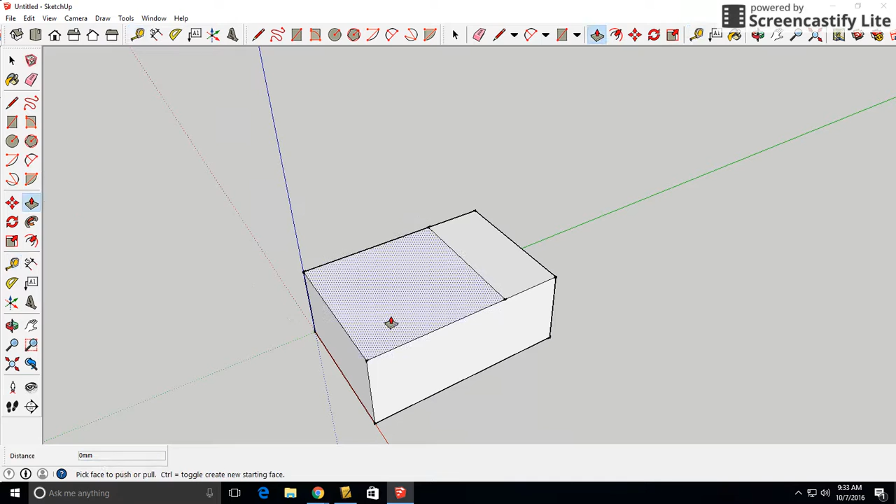If I come back to my image, just to verify, the overall height is 40. So that helps identify we're going to bring this surface down a distance of 20 millimeters, and we're going to remove that section. That's going to get us started for the lower half.

Now on the back section here, there is a cutout, and we need to do that one before we can extrude through the front face. Looking at this back piece of detail, we see that it is 40 millimeters wide, and it extends through the entire back part of that drawing.

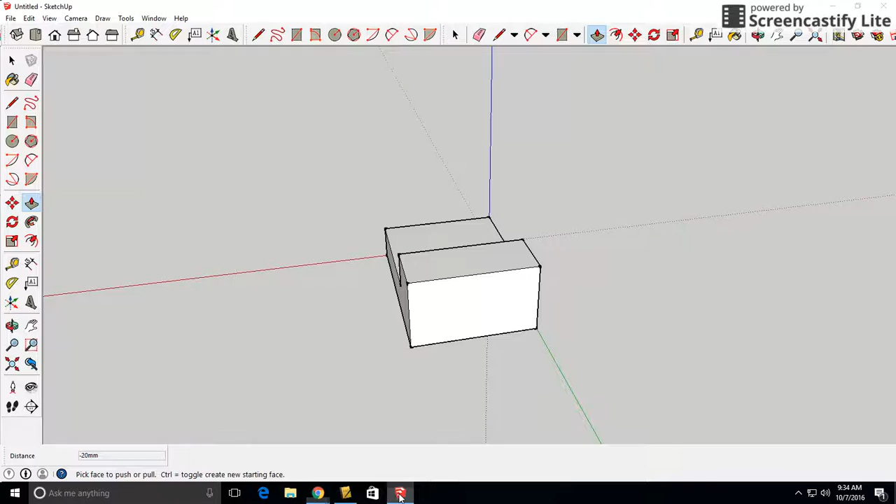Now, there is no center point identified, but in this drawing, these features are on center, so the center point of this would be at the 20 millimeter mark, the middle right there. So the first thing I need to do is identify the center of the back part of this feature. We know the overall width of that is 70, so half of 70 would be 35.

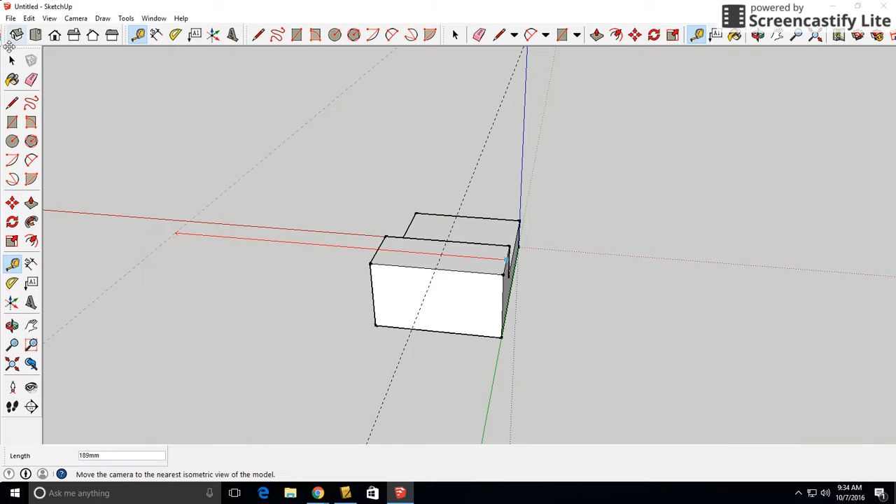So I'm using the tape measure tool to give us a reference mark 35 millimeters in from one edge. If I measure to verify, it's also 35 from the other point, so that way we know we're halfway. Now I'm going to use the pencil tool, and we're going to sketch out this feature.

Now we know that that feature is at a depth of 10, and we see that dimension here. It is 10 millimeters deep, 40 millimeters wide, and it spans the entire depth of the project.

So I can come back here. Now, if the overall width is 40, that means half of it is going to be 20. So I'm going to come out 20 millimeters, hit enter. This is going to be the end of that feature.

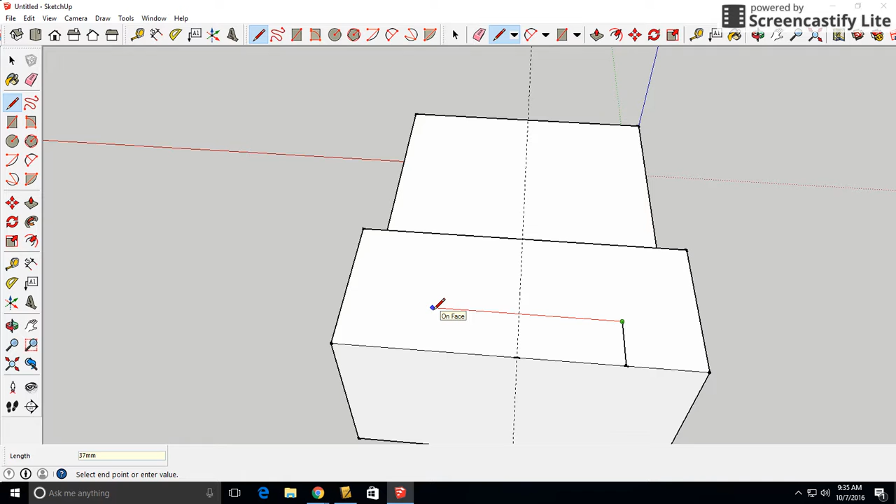So I'm going to click, drag back in. We identified a depth of 10, so we can click 10, enter, and we can come all the way across for a distance of 40 and back to the front.

Now that we've got this piece sketched out, we can use the push-pull feature, select that box, and drag that feature through the entire drawing. Now we've got one of the pieces of detail in the drawing.

If we go back here, now we see there's also a cutout on the front face. So now we're going to identify where that piece goes, and we're going to cut that out of our drawing. Now the width of this is at 30 millimeters, and it comes to a depth of 15.

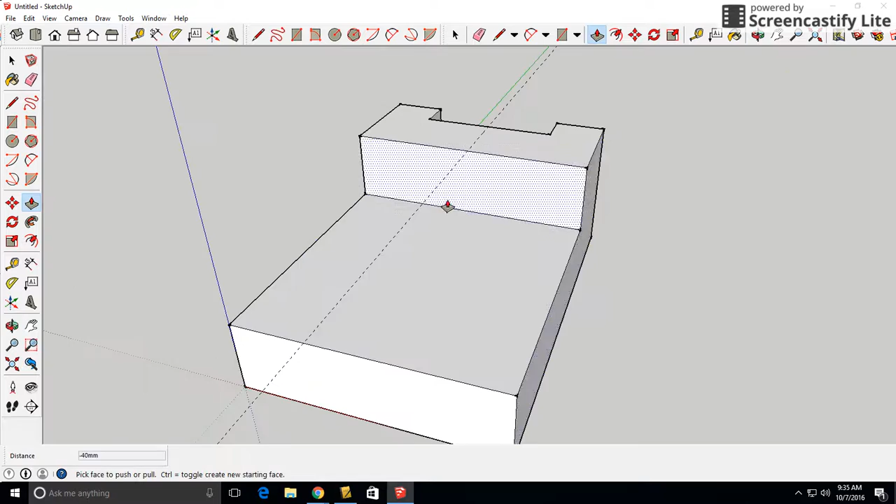So I'm going to go back to my image. Again, we're working from the center point. Here's the center point of my piece. If it's a width of 30, that means half of that is 15. So I'm going to select my pencil tool and pull out a distance of 15 millimeters.

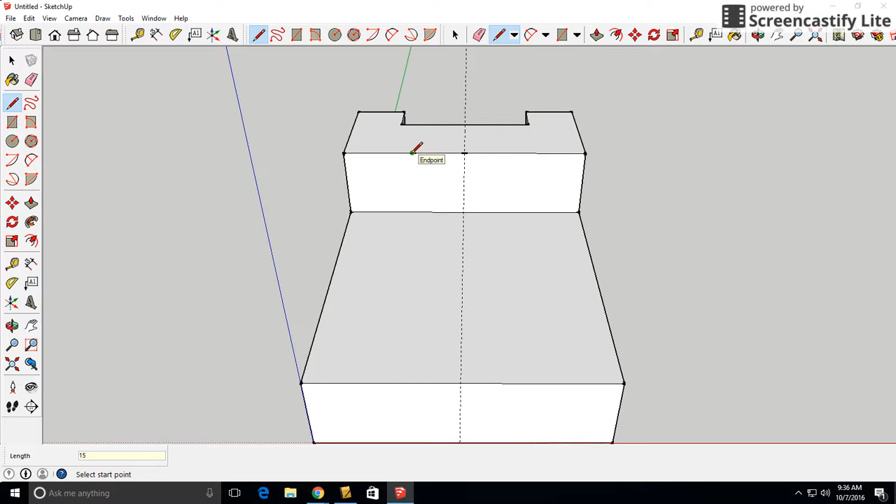This is going to be the corner of that feature, so I can click on that corner. I'm going to drag down, making sure I'm on the blue axis here so the line is going straight down, and that goes down to a depth of 15. And I can drag that line over.

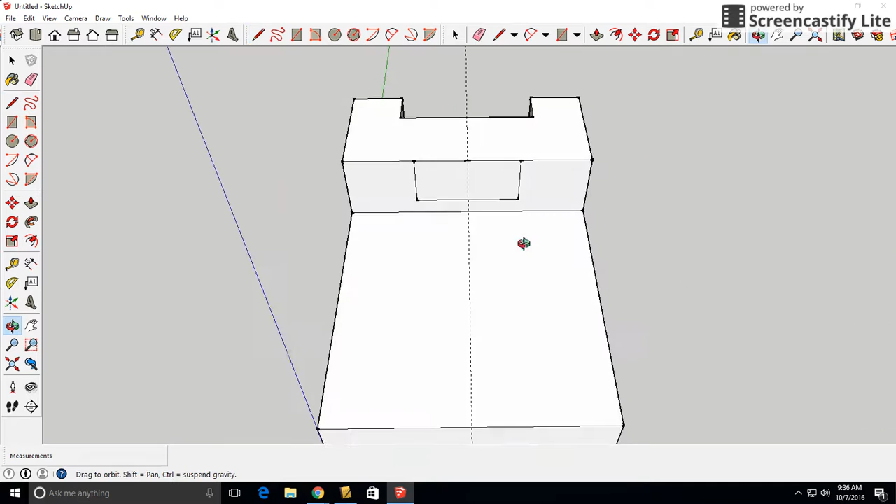Now I can go all the way to the opposite edge to a distance of 30 millimeters and come back up to the front face. Once you get this component sketched in, we can use the push-pull tool to drag that piece all the way out.

Now, it's important that you do these two steps in the order in which we've done them. We extruded the larger piece out first and then the smaller piece out second. Had you tried to extrude this smaller piece out first, you would have had a conflict, and it wouldn't have been able to pull the larger piece down because it would have been missing some of that material.

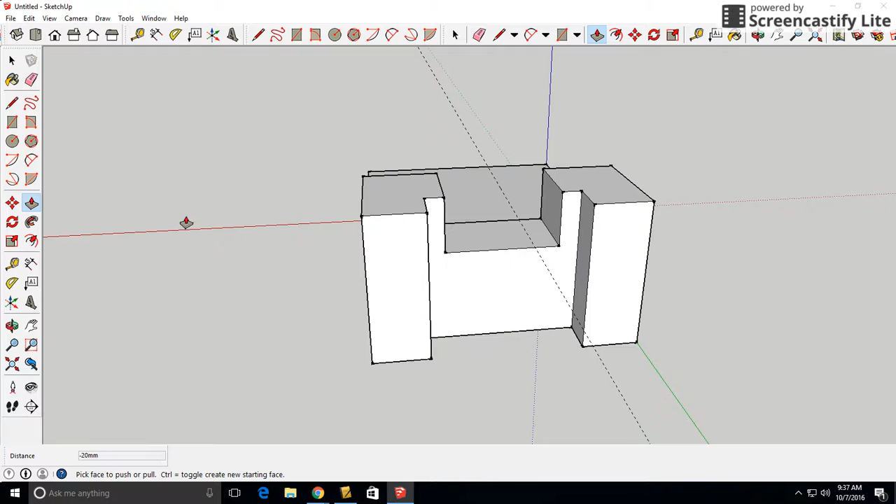So part of understanding SketchUp is also understanding the order in which you need to put these details into the drawing so that the program will work for you. All right, that's where we're going to finish tutorial part 2. Tutorial part 3 will finish the front part of the drawing.